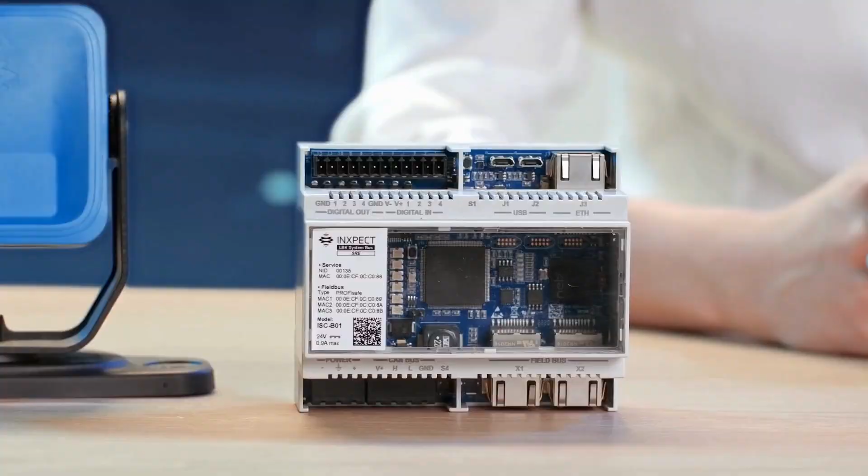Inxpect safety products are the first SIL 2 PL d and UL listed radars in the world. They provide advanced operator safety in dangerous areas through access detection and restart prevention functions. Now, let's see how to connect the system and complete the initial setup with the Inxpect safety application.

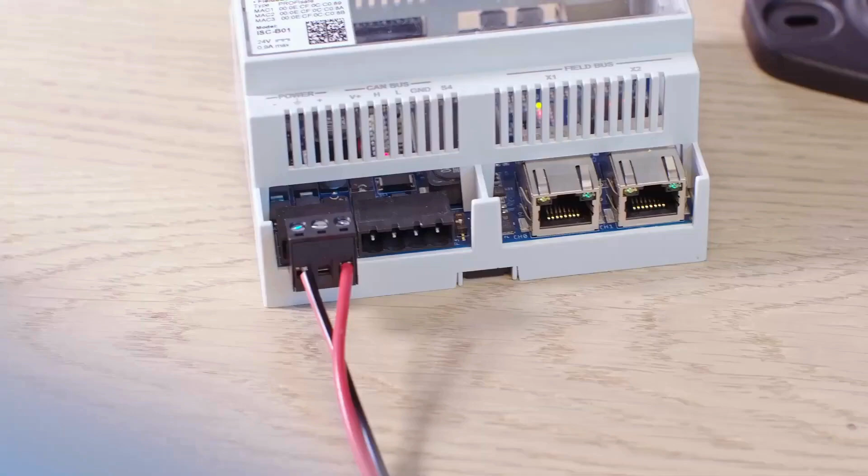We'll start by connecting the control unit to the power supply. Then we connect it to the first sensor. After this, we connect the first sensor to the second one, and so on. It is possible to connect up to 6 smart sensors to each control unit.

The Inxpect safety application can be downloaded through the Inxpect official website. Now that the software is downloaded and installed, let's first select the desired language. Click on the drop-down list at the right-hand corner of the screen. Let's have a look at the main part of the page.

We have 3 scenarios for the device connection: the Ethernet connection, the USB connection, and the system simulator mode. But which one do we choose according to our needs? Let's find out. The choice between Ethernet and USB connection is based on the cable availability, and obviously with respect to the control unit model, whether it is provided with an Ethernet port or not.

To connect the control unit to the computer via Ethernet, we take a standard Ethernet cable and insert it in the correct port. In order to communicate with each other, the computer's IP address must be in the same subnet of the control unit. In this example, we connect the Ethernet cable to the control unit and the computer.

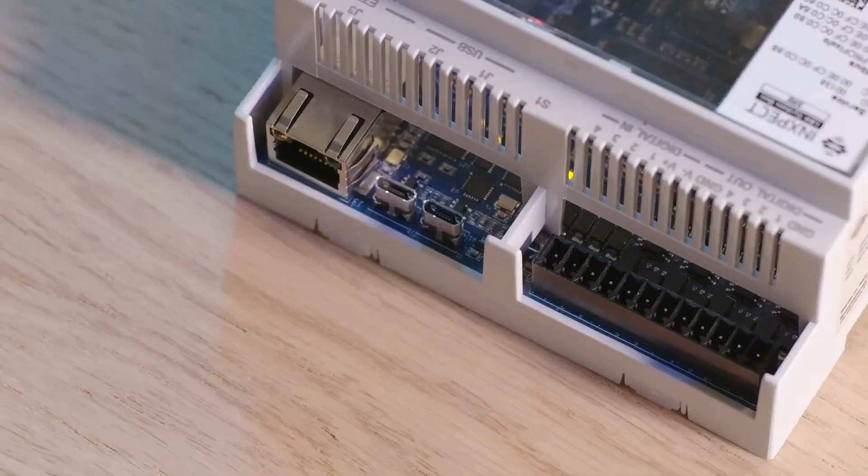If we choose to connect with USB, instead we need a USB to micro USB data cable. A charging-only cable won't work. Connect it to the correct port of the control unit. To complete the operation, just click on the Continue button.

That's it. Keep in mind that if we use a Windows computer, we need to download and install a specific driver to recognize the control unit. Such a driver is available for download at the same link of the Inxpect safety application.

The system simulator mode allows using the software even when you don't have a physical system at your disposal. In other words, it is possible to create a configuration without physically connecting to the device. In this way, connecting the device on site will make it easier to load the prototype configuration and refine only the details, instead of starting from scratch.

You can find further information right here: Resources and Tools. Identify system specifications. This comes in handy in case of problems, since it allows identifying the system depending on the version of firmware and software you have. These specifications help our technical support team understand what is not working and how to solve the issue.

This other option allows upgrading the system's firmware to the latest version. It does not involve any connection to the internet or any download. It is only a wizard containing the software that automatically upgrades the control unit.

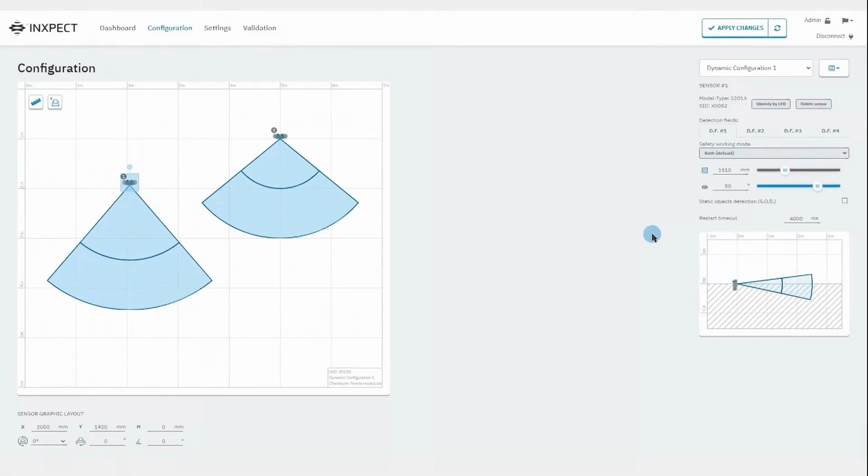The settings page contains various system settings, such as digital input-output configuration, network parameters, fieldbus and Modbus parameters, activity history, as well as many other features that will be covered in the next videos. The validation page helps show the detected targets and related information in real time. This is super helpful to make sure that the installation is performing as expected.

The left-hand side of the dashboard shows the status of each system component. In this example, we have one control unit and two sensors. The color of each status icon indicates the status of the component. When orange, it means that the system has yet to be configured. If it's green, the component is working properly. Finally, red indicates an error.

The first time we log in, the status icon next to the device is orange. Let's see how to take care of this. We just need to configure the system. The Apply Changes button will commit the changes we made to the system and transfer them to the control unit. Otherwise, if we're not satisfied with the changes, we just need to click on the Refresh Configuration button and try again.

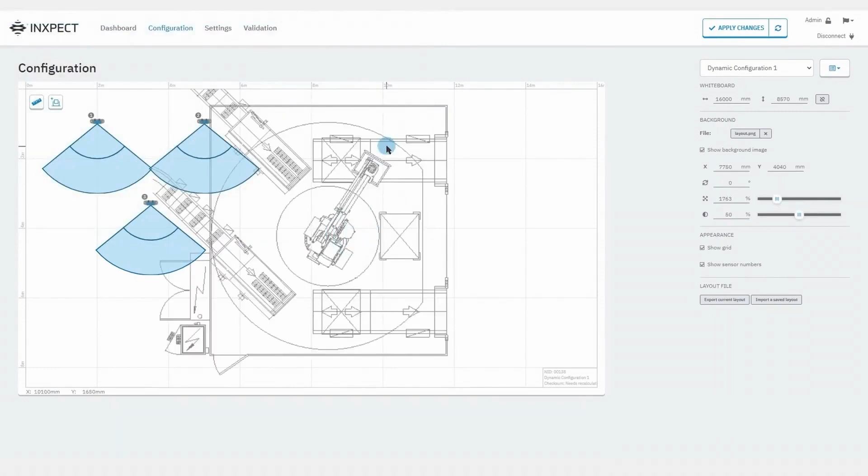It is possible to import to the whiteboard an image representing the layout that can be appropriately scaled. Note that the layout we create in the whiteboard can be exported and used later. The graphical parameters allow us to represent the position of the sensors, as well as realize the way we monitor the hazardous area. Let's see how. By selecting each sensor, we can choose the spatial position and rotation around each of the three axes.

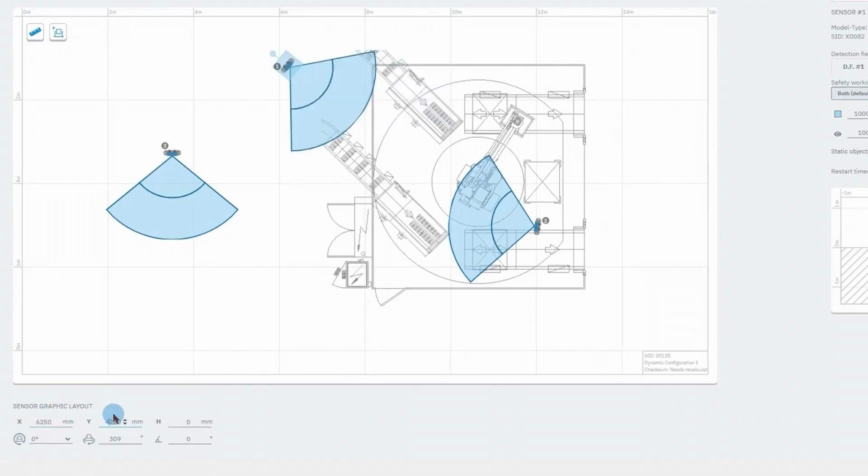As an alternative, we can use the mouse to move and rotate the sensor. By doing so, bear in mind that it's possible to operate only the rotation with respect to the z-axis, while rotation around the x and y axis is managed from the menu under the whiteboard, as mentioned before.

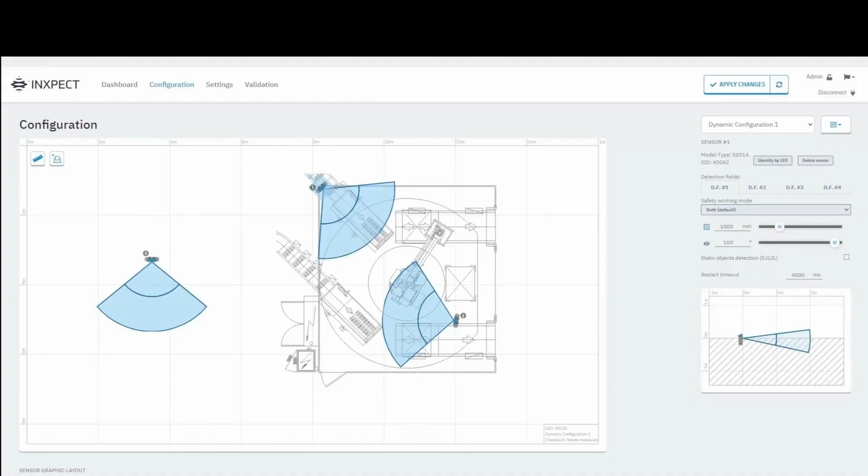For each sensor, we can modify all the operating parameters shown in the menu on the right-hand side of the screen. There are several detection fields that can be configured individually. For example, the Smart Sensor 200 series has up to 4 detection fields. For each of them, there are 3 safety working modes that we can choose from: Always On Access Detection, Always On Restart Prevention, or both options.

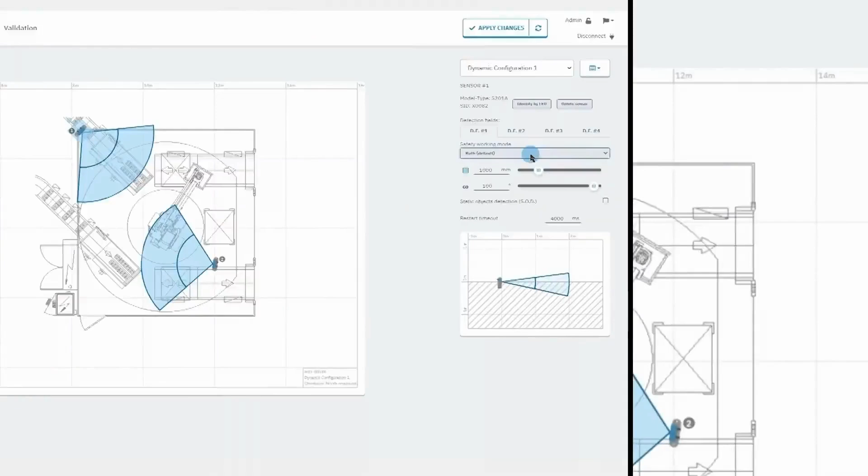We can also choose the detection distance and the angular coverage of the field of view. And we can enable the static object detection option and the restart timeout. Remember that for the Smart Sensor 200 series, the restart prevention function is deemed safe only with timeouts of 4 seconds or longer.

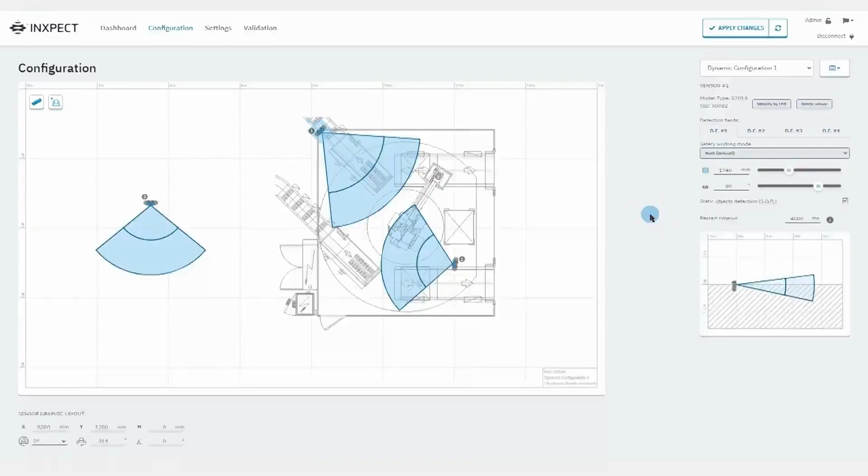Please note that it's possible to create multiple configurations of the sensors and switch dynamically among them in a safe way, via digital inputs or field bus. This drop-down menu serves exactly this purpose. It allows us to add, duplicate, and delete configurations. Once we finish making changes, click on Apply Changes in order to save them on a control unit and activate them.

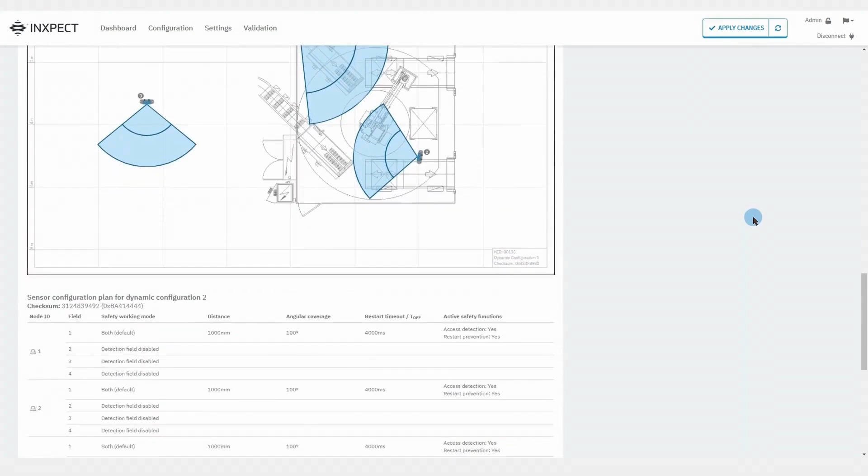After this, a configuration report will be shown. The reports are documents that cannot be changed and can only be printed and signed by the Machinery Safety Manager. We can find these documents also in the Configuration Reports archive. A couple more details. If we want to remove a sensor from the configuration, we can click on the Delete Sensor button.

Otherwise, if we need to identify the sensor to configure, we can click on the Identify by LED button. Subsequently, the LED of the corresponding sensor will start flashing for 5 seconds, allowing you to identify it. Alright, we have configured our first sensor. To find out more on how to proceed with the settings, watch the next video.

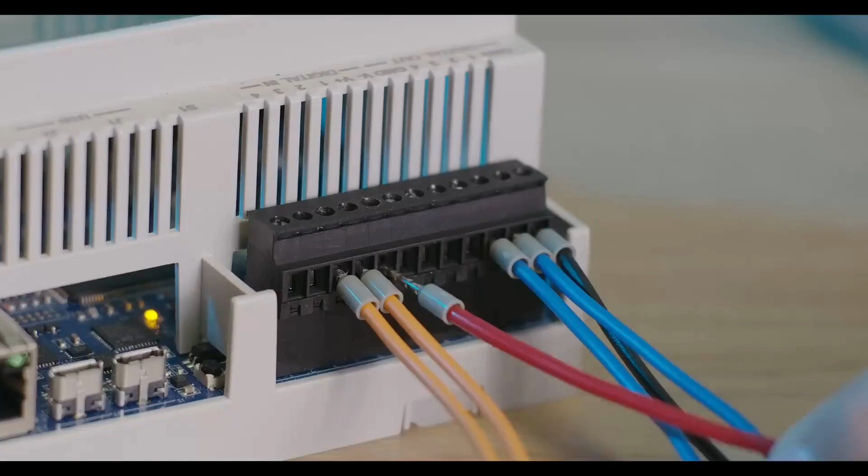Each group can be independently muted by a digital input. Keep in mind that the SNS and ground inputs must also be connected if at least one input is connected. Instead, regarding the configuration of the outputs, it is possible to select the muting enable feedback signal to have feedback when at least one sensor is in muting condition.

Lower on the page, we can configure the muting signal so that the function is enabled only if both logic signals of the dedicated input meet specific characteristics. That is, pulse width, signal period, and phase shift. Let's now take a look at the restart function. The system manages 3 types of restart prevention for each detection field: automatic, manual, or safe manual. Let's analyze them in detail.

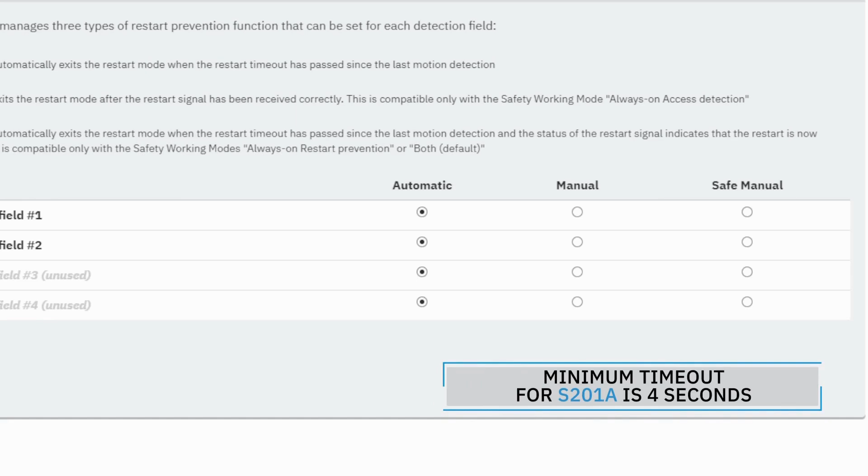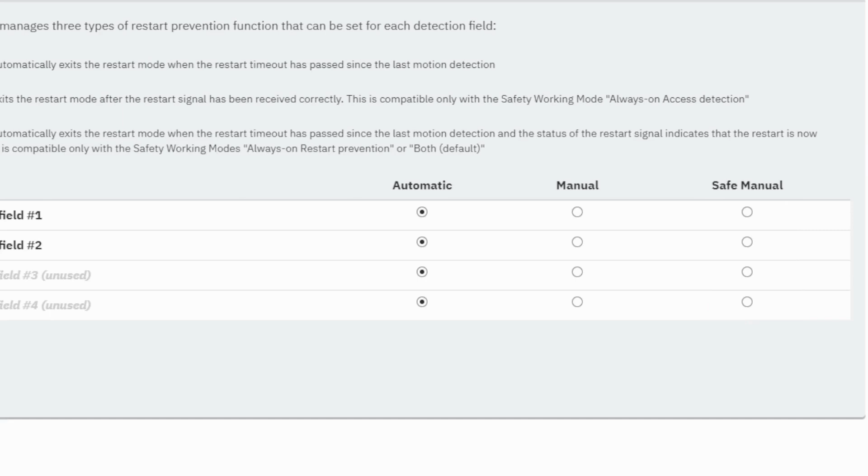The automatic type does not require the operator to take any action. The system automatically reactivates the safety outputs once the area is clear of movement. In the manual type, the safety outputs are reactivated by an external restart signal that can be a button pressed by the operator. The safe manual type is the combination of the two functions just described. The sensors perform the restart prevention function and then wait for a restart signal from outside the system.

Here you can assign the desired type of restart prevention function to each detection field. As we can see from the warning message, if the selected restart function is either manual or safe manual, we need to go back to the digital input-output section and assign a restart signal to the digital input that we want to use for this purpose. It is also useful to configure a digital output by selecting the restart feedback signal, so that it gives us feedback when there is no more movement in the area and the operator can manually restart the system.

This section includes the anti-tampering functions of the system, which can be configured for each sensor individually. The anti-tampering functions are anti-rotation around the axis and anti-masking. Let's see together what this is all about. The anti-rotation function can be enabled to detect a change of the rotation of the sensor around each individual axis. Tilt is the rotation around the x-axis. Pan is the rotation around the y-axis, and roll is related to the z-axis.

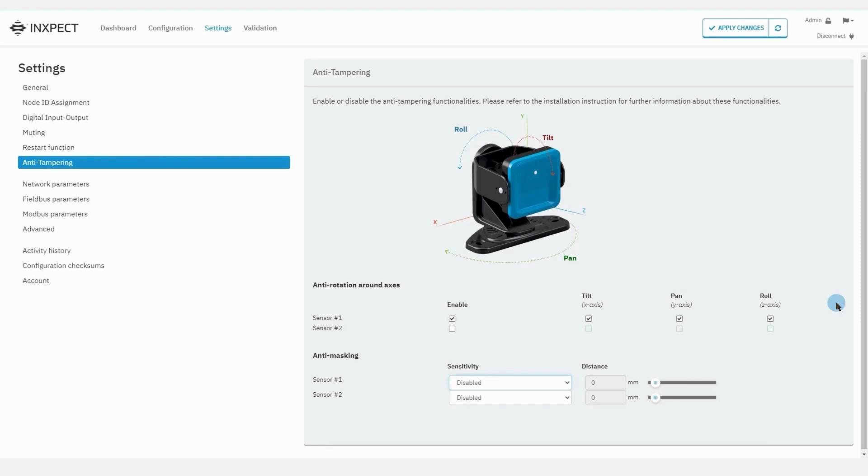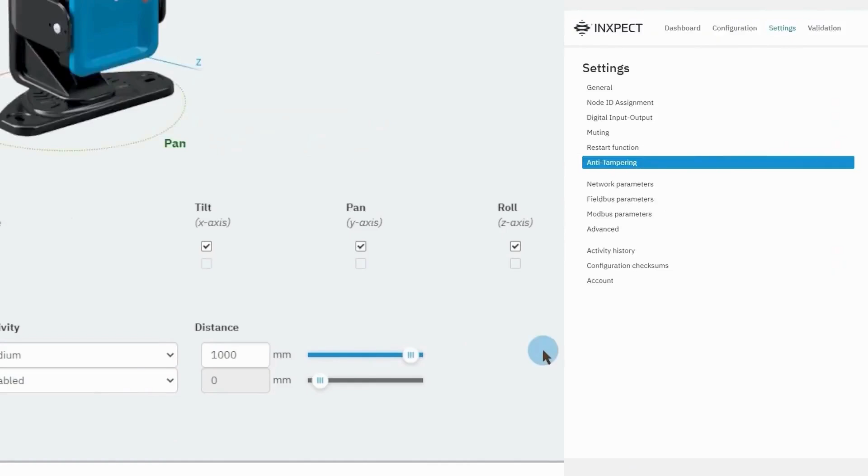Let's now focus on the anti-masking function. This is used to detect if an object occludes the field of view of a sensor. This function can be enabled individually for each sensor. Two parameters control its response: sensitivity, which is low, medium, or high, and the maximum detection distance. Please note that a click on the Apply Changes button at the end of the configuration will save the parameters for both anti-tampering functions.

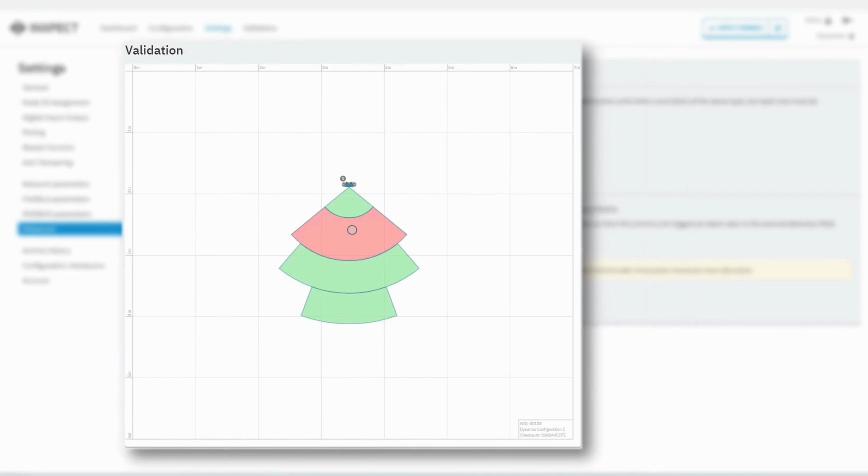The detection fields dependency parameter will determine whether a movement sensed in a specific detection field will lead to the deactivation of just its own output or also of the ones related to the detection fields that follow.

In the Activity History section, we can find the log verbosity level, which allows configuring the level of detail of the internal log data, and a Download Log button, that we can use to download the log from the control unit, which contains information events and diagnostic events.

The Erase Log button allows us to delete the Information Events section. In case it's not deleted, the oldest information events are overwritten when the maximum size of the section is reached, that is 3500 events. There is also the Download Sensor Debug Info button. This allows downloading a zip file useful for debugging where requested by the Inxpect technical support team.

Finally, the Configuration Reports archive, which allows us to access the archive of previous reports and download the related PDF files to the PC. In this section, we can find a list of configuration checksums. Let's look at them together.